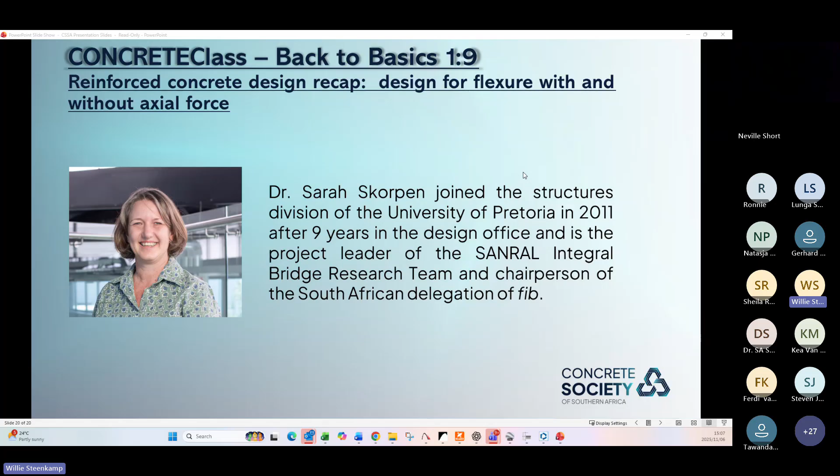Coming back to today's Concrete Class, Back to Basics 1.9. The topic is reinforced concrete design recap: design for flexure with and without axial force. The presenter is Dr. Sarah, who joined the Structures Division of the University of Pretoria in 2011 after 9 years in the design office, and is project leader of the SANRAL Integral Bridge Research Team and chairman of the South African delegation. So without further ado, Sarah, I'll hand over to you, and you can start and share your presentation.

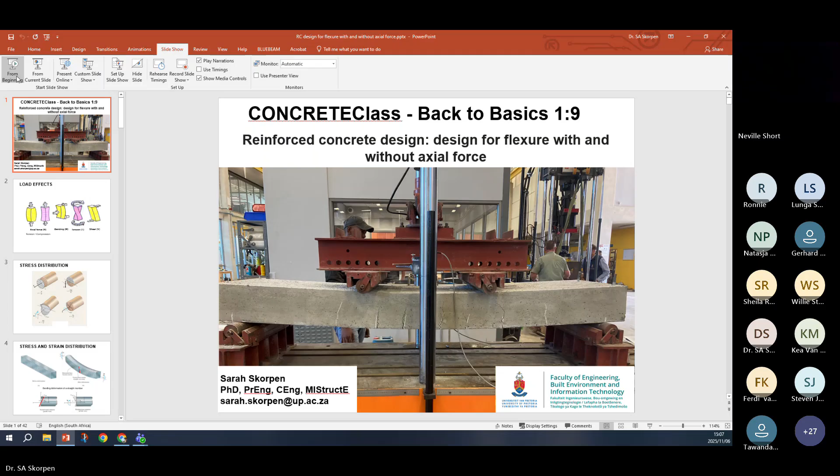Thanks, Willie. Just checking, can you see, is that coming through on your side? Yes, I can see your screen, and it's in presenter mode. Great, thanks.

Good afternoon everyone, and thank you to the Concrete Society for this opportunity to talk a little bit about design for flexure with and without axial force for reinforced concrete beams, and columns if you've got axial force. The intention here is basically a high-level overview of the structural principles we use when designing reinforced concrete beams. I've put on this title slide a beam that we're testing in the lab, in our Engineering 4.0 lab using our MTS machine, testing it in 4-point bending. You can see the cracking that's happening, which is very typical of a flexural type failure as we keep loading the structure.

So going back to real basics, the first thing we do when we're designing a structure is analyze the structure, understand the effects of the load on it. In any structure, there are only 4 load effects you can ever get: axial force, bending, torsion, and shear. Whatever kind of load you get on the structure, it's going to result in one of these load effects or a combination of them.

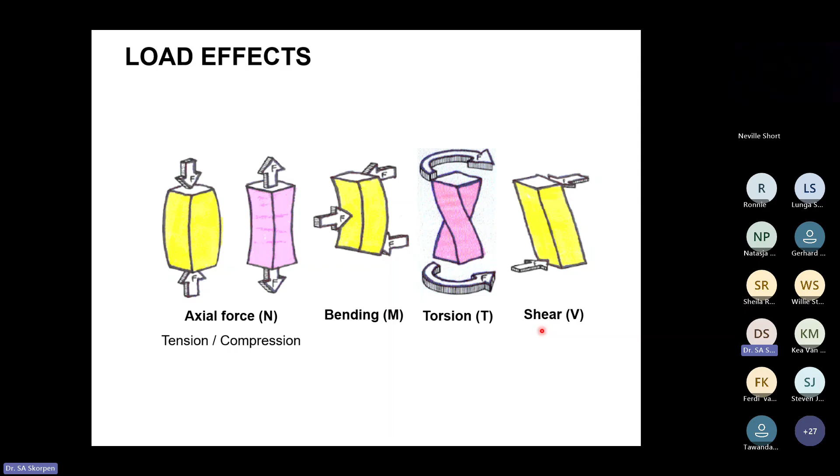These load effects, axial force, bending, torsion, and shear, if you go back to your strength of materials textbook, you'll see we look at the stress distribution resulting from these load effects. We note that when looking at the actual stress caused by load on a structure, we only get 2 different types of stresses: a normal stress, perpendicular to the cross section, and a shear stress, which is in the plane of the cross section.

When you're looking at axial force, in this top left-hand corner, this is a tensile axial force causing a stress perpendicular to the cross-section. That stress is a uniform stress equal to the intensity of the force divided by the cross-sectional area.

When we look at bending, this also causes a stress perpendicular to the cross-section, but the magnitude of the stress varies from the neutral axis out towards the outermost fiber. The equation is stress equals My over I, so it's dependent on the magnitude of the load, the distance from the neutral axis, and the stiffness of the cross-section, the I value.

If we look at the other 2 types of load effects, shear and torsion, these both cause shear stress. A shear force causes a shear stress dependent on the magnitude of the shear force and the width of the cross-section, that value t. That stress distribution is parabolic, so it's 0 at the outermost fiber and increases towards the neutral axis.

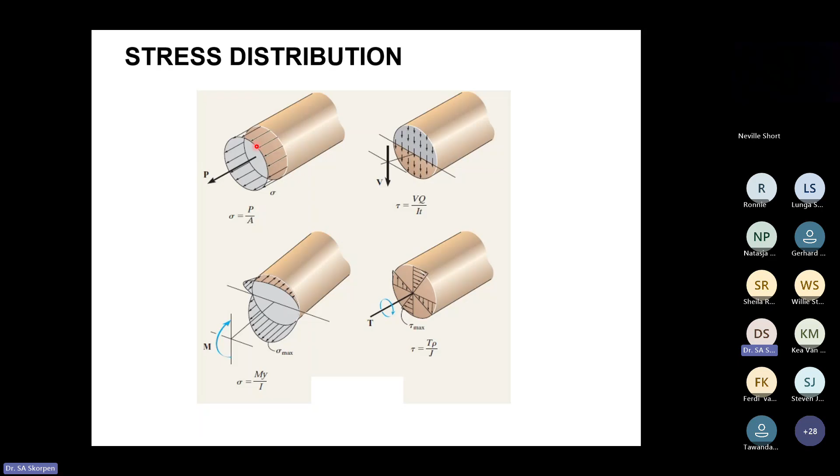So if we now look at what's happening when a beam bends, the first thing we look at is what kind of deformation or strain we get in the beam caused by bending. If we look at this rectangular beam before and after we apply the moment, and draw horizontal and vertical lines, these horizontal lines will become curved with the bending moment, and the vertical lines will remain straight but rotate. That gives us the starting point to understand what is happening in a beam when we're looking at bending.

If we plot these vertical lines in terms of the strain profile, we'll see that the deformation profile within the cross section is a straight line. So we have normal strain, which is linear, and it changes at a certain point from stretching to squashing, going from tension to compression. That is what we also see with the stress distribution - the strain and stress distributions are linked, giving a linear strain distribution, and when we're in the elastic range, a linear stress distribution.

In this instance, we would have tension on the bottom and compression on the top, and you would have a tensile stress below this zero strain, zero stress point, which is defined as the neutral axis, and it would vary linearly out towards the outermost fiber. The relationship here is stress equals My over I, our classic formula for understanding flexure. This just reminds ourselves of what's actually happening in flexure.

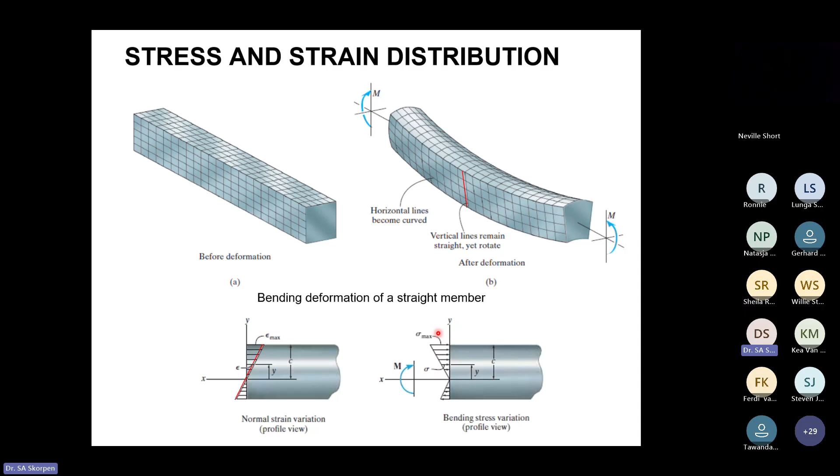Another helpful thing when looking at flexure is to examine the principal stresses and their distribution through a cross section. Here is a simply supported beam with a uniformly distributed load, and this plots half of the beam with a center line. Just to refresh your memory, principal stresses are the maximum and minimum normal stress, perpendicular to the cross section, at any given point, acting on a specific plane where there is no shear stress.

When we look at the principal stresses in the middle of this beam, they act perpendicular to the cross section, specifically at the critical outermost fiber points where we get maximum stress. As we move towards the edges of the beam, the shear forces causing shear stress start to influence the orientation of the principal stresses. You can see clearly compression stress in the top of the beam and tension stress in the bottom. With concrete, we're really interested in where the tension is, because concrete doesn't handle tension very well, so we need to make a plan with our reinforcement.

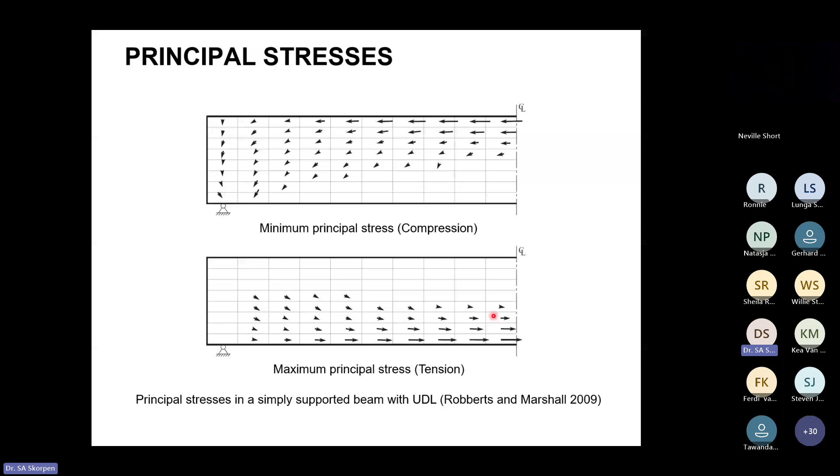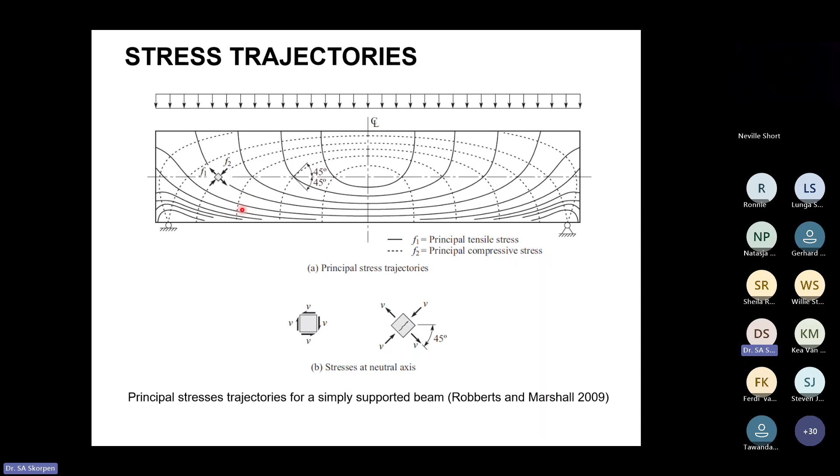We can also plot stress trajectories, which are basically a set of orthogonal lines that map the direction of the principal stresses, helping us visualize the flow of forces through the structure and understand how to reinforce it. We can see the principal tensile stresses here, which are basically parallel to the beam axis. As we move to areas of high shear, that angle changes, helping us understand how the beam will behave if we don't reinforce it, and we reinforce it to withstand these stresses.

The next thing we need to understand, moving from the loads on the structure and the stresses they cause, is how the material behaves under load. The first graph, from Robberts and Marshall, looks at compressive stress versus strain for different sample sizes and shapes.

We know in South Africa we use quality control on site-cast cubes to verify the compressive stress of concrete. In America, they use cylinders. You can see if you had the same strength concrete, you would have a higher compressive strength with a cube versus a cylinder, because of the reduced confinement in a cylinder. So a cylinder strength is approximately 80% of the cube strength, and you can see that difference here.

But now we're not just looking at something working in compression, we want to look at flexural behavior - specifically the flexural compression strength. You can see here that if you plot the flexural compression strength of a beam with a bending moment, it's approximately 2/3 of the cube strength, or 85% of the cylinder strength. That's an important thing to keep in mind.

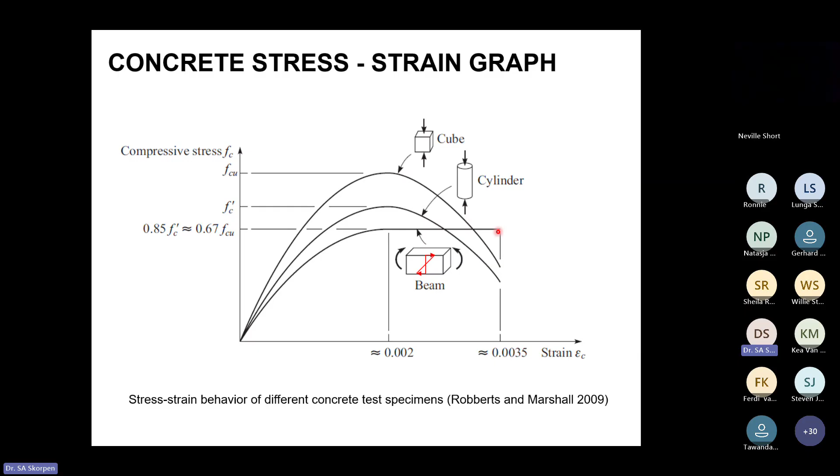We also see here that the stress-strain behavior of a beam with a moment applied to it gives a parabolic stress distribution up until a strain of approximately 0.002, after which we get a fairly uniform increase in strain with a constant stress level. This is also a principle we're going to use to calculate the moment capacity of a beam.

So here is the stress-strain graph of our concrete on the left-hand side, plotted next to the simplified stress-strain graph for reinforcement. There's a fairly big difference. You can see we've got a parabolic curve for the concrete, so it's fairly non-linear up until a point where it flatlines basically.

The other thing we're not plotting here is the tensile strength of the concrete. This is looking at the compression strength of the concrete. The tensile strength of the concrete is fairly low, only about 10 to 15% of the compression strength. So concrete doesn't handle tension very well. Yes, it can handle some tension, but we really want the reinforcement to handle the tension, because this is pretty much equally strong in tension as well as compression.

We've got a fairly linear stress-strain relationship, and we know that the E value, the stiffness of the material, is approximately 200 gigapascals until we reach the yield strain, which for our 450 MPa rebar is 0.001957. After that point, we've got a lot of ductility within the material. You can see it can handle a lot of strain before you would eventually get to any kind of fracture. So it's fairly linear in the elastic range, and it's a very ductile material, as opposed to concrete, which tends to be more brittle.

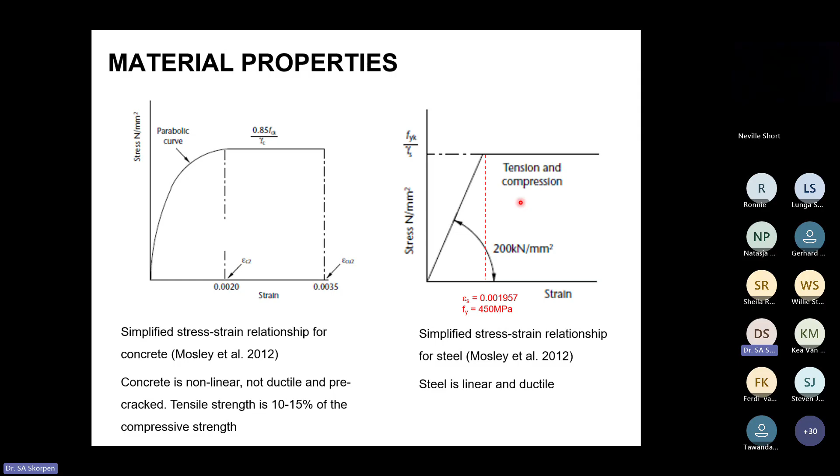This is an important structural principle that we use to our advantage in structural design: we make use of ductility to help us. Before we move on and talk more about ductility, we must remind ourselves what ductility is. If I've got two graphs here, on the left-hand side we've got the stress-strain graph of a brittle material, and on the right-hand side we've got the stress-strain graph of a ductile material.

You can see the brittle material has very little plastic deformation that can happen, and a very small amount of strain happens before you get fracture, and this point would be where it fractures. So very little warning before you get failure, as opposed to a ductile material - and this is looking at structural steel - you can see a lot of deformation happening before you get final fracture.

So ductility is basically a measure of the strain deformation that a material can undergo before you get final fracture. What one needs to watch out for in structural steel is as you tweak the strength of the steel, typically done by adding carbon, you're increasing the amount of stress it can handle, but you're decreasing the ductility - the amount of strain that happens before you get fracture.

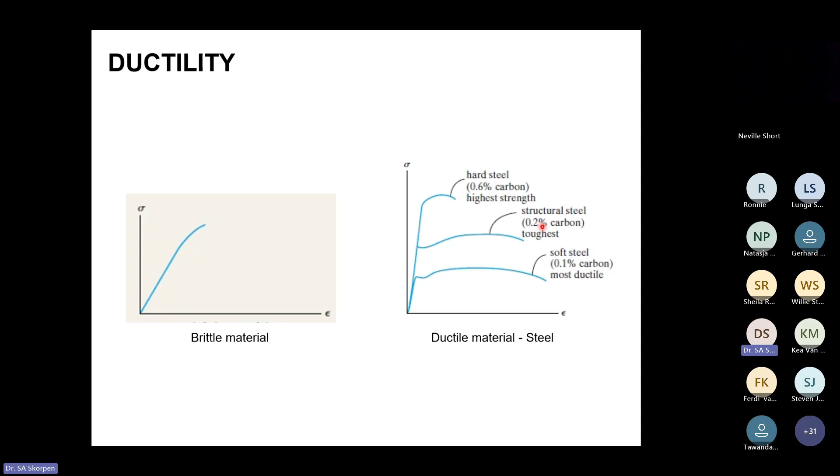Now if we take all this background information and look at what we're trying to do with the reinforced concrete beam, we're basically designing a composite beam where we use the tension reinforcement to handle the tension that develops in a beam that's bending, and the concrete on the other side of the neutral axis handles the compression.

This composite action requires that we make sure we've got sufficient bond. If you had a bond failure, you couldn't get this kind of composite action.

When we are looking at an ultimate limit state design, we would basically be ignoring any contribution of the concrete in tension below the neutral axis, and we assume that the reinforcement is doing all the work, and then above the neutral axis the concrete handles the compression side of things.

Basically you end up with this equilibrium situation where you've got a resultant compression force in the concrete equilibrated by the resultant tension force in the steel, and the moment capacity is a couple moment - force times distance, or force times lever arm. So that's the principle we're looking at, and it's a composite design.

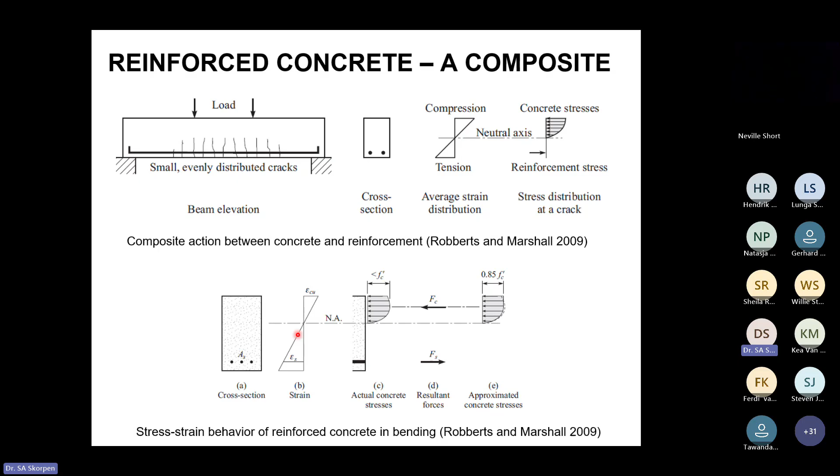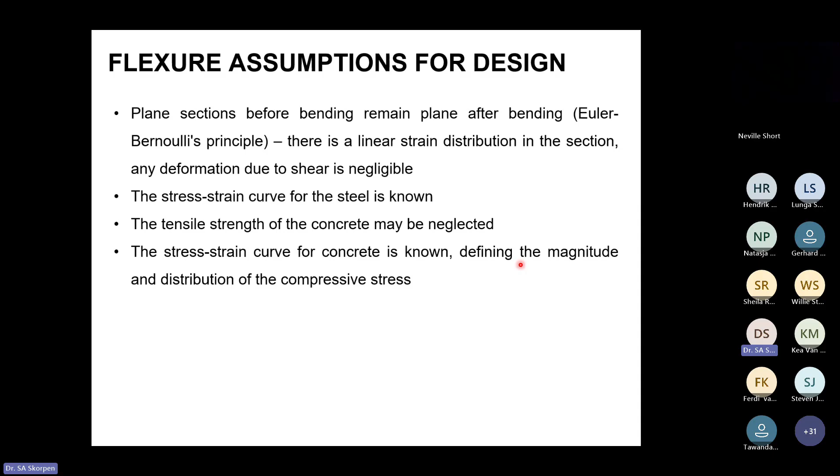That's basically what we're saying with plane sections remain plane. The other important assumption is that the stress strain curve for the reinforcing steel is known, that the tensile strength of the concrete is negligible, and we're going to ignore that, and that the stress strain curve for the concrete is known, so we have the magnitude and the distribution of the compressive stress that can develop in the concrete. So those are our assumptions that we use going forward.

If we look at that in a bit more detail, what is happening to the curvature and bending within the beam as we increase the load. This is a nice sketch from Robberts and Marshall, just looking at the distribution of stress and strain for flexure as the moment is increased. And this little graph here shows curvature.

Curvature is basically defined as the measure of how much the beam would bend. It's the rate of change of the slope of the beam under load. It's the magnitude of the moment divided by the E value and the I value of the material and the cross section, basically. So that's curvature, but it's basically linked to bending and to the amount of deflection that happens.

On the vertical axis, we've got the moment here, and you can see 4 points that I've plotted here. The first point is where the concrete cracks, and you can see very linear behavior until the concrete cracks. Then you get a sudden softening, a sudden loss of stiffness as well when the concrete cracks. Below the neutral axis, we would be ignoring any contribution of the concrete in tension, and now all of that tension force is going to be assumed to be taken by the reinforcement.

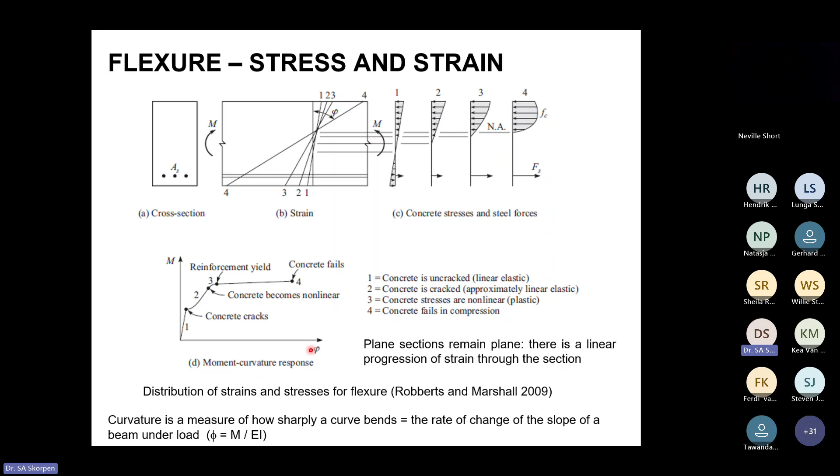And you can also see that if this is now what is happening in the structure, there's a fair amount of ductility in this structure, but we're going to look at that in more detail because this is going to depend on how much reinforcement you've got as to how much ductility you've got in the section. So on that note,

What we want to have in our reinforced concrete structures is typically called an under-reinforced beam, where we have a ductile tension failure. That is basically saying we've got a low enough steel content in the section that the steel yields before the concrete reaches its maximum strain. And we said that maximum strain, where concrete would fail brittly in compression, is 0.0035.

So this is the strain distribution that we want, and this can only be like this if we don't put in too much steel, basically. So we make sure that the steel percentage enables the steel to yield before the concrete crushes, basically. And this would be a tension failure. So we call this an under-reinforced concrete beam, but basically we're forcing the steel to yield before the concrete crushes, which would be a brittle type failure.

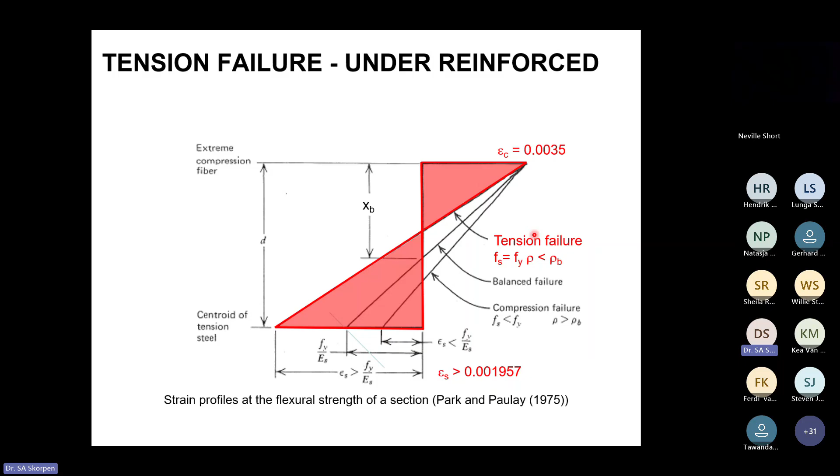An over-reinforced concrete beam would be where the steel does not yield and the concrete reaches its maximum capacity before the steel can yield. You can see here that the neutral axis is dropping right down, and this would be classified as a compression failure. And this failure would be a brittle type of failure, a very sudden failure.

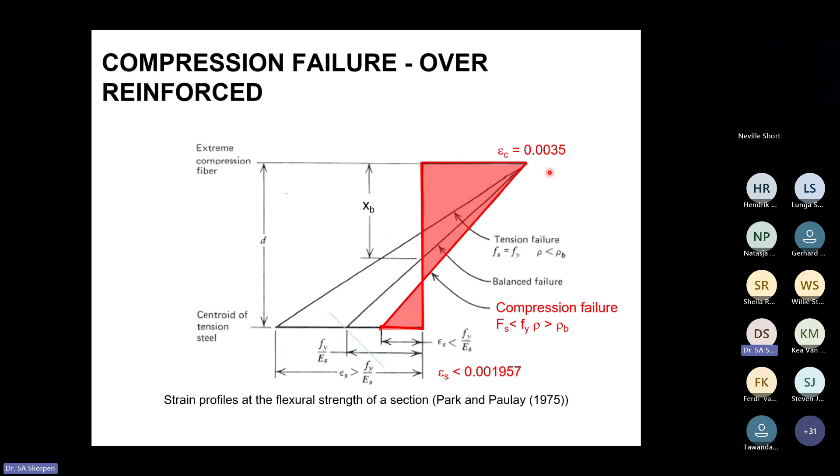So this is a failure we don't really want in our structures. We'd rather have a lot of warning before we see the failure happening. But here, if the element is over reinforced, you would get the concrete maximum strain reached, and that maximum strain is 0.0035, before the steel reaches the strain at which it yields.

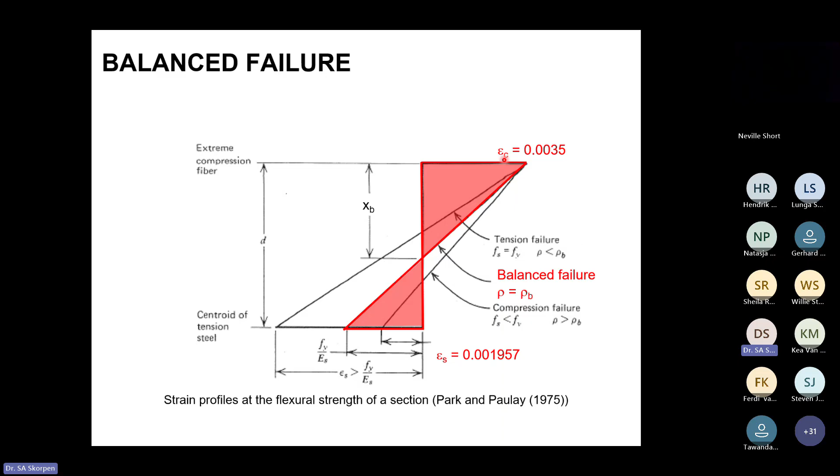Now, what our calculations or formulae are based on is something called a balanced failure, which is where the concrete crushes as the steel yields. So this percentage of steel - we could calculate what this is - but this would give us a balanced failure, which is concrete crushing as the steel yields.

Just to illustrate this further, this is a sketch, or a graph, two graphs just showing the moment versus curvature, curvature on the horizontal axis, for an under-reinforced versus an over-reinforced beam. And you can see here the crack moment, M sub CR, would be very similar for both of them,

but we get a lot more ductility out of an under-reinforced beam versus an over-reinforced beam. You can see very sudden failure just after the linear elastic region here - you're getting a compression failure versus a lot of plasticity and ductility shown in the under-reinforced beam.

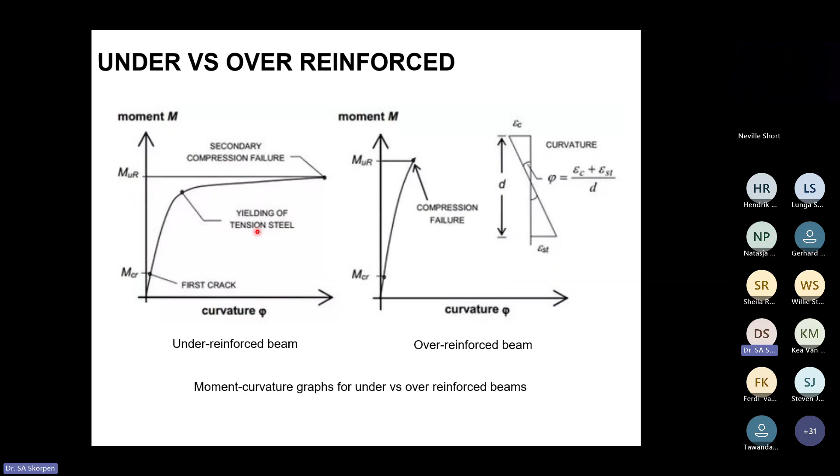This is something we do every year with our third year class. We test three different beams to failure: an under-reinforced beam to failure, an over-reinforced beam to failure, and we also look at a shear failure, which I'm not going to talk about today. This is just showing a ductile failure mode with a fairly uniform distribution of cracking, typical of something working in bending.

There's flexure happening here, and you can see these crack widths. If you only had one crack, there's probably very little bending happening, which would be synonymous with some kind of restraint, like restrained shrinkage. But when there's flexure, you see these fairly uniformly distributed cracks, so you can follow the curvature of the beam.

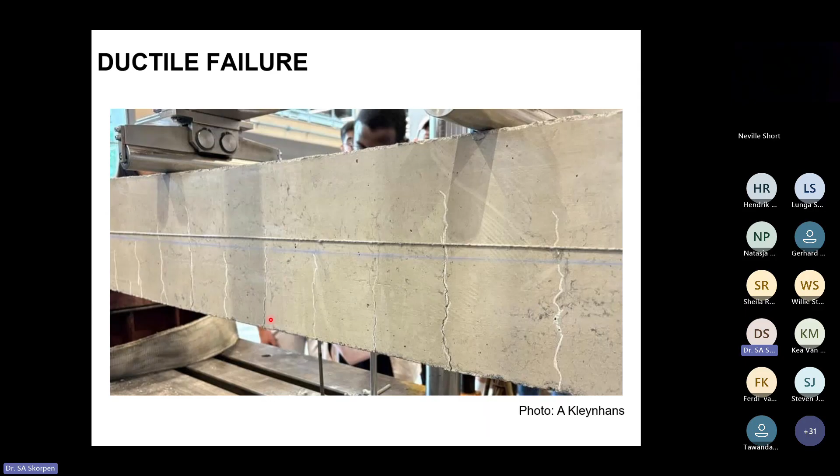Here's another view, just showing the bend. You can actually see the deflection here, and these uniformly distributed cracks. Eventually the steel would start to yield, and a final failure would occur when the concrete crushes.

But if you had an over-reinforced beam with a brittle failure mode, you can see much smaller cracks, and then all of a sudden this brittle failure where the concrete suddenly crushes — that's your over-reinforced beam.

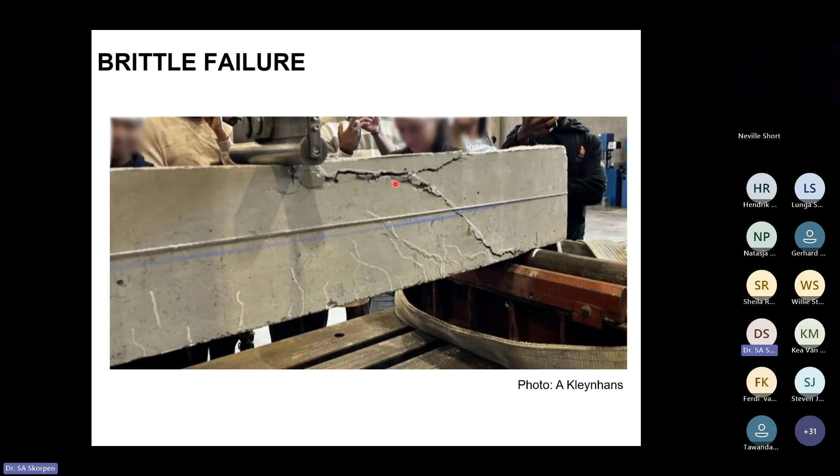So we're using the terms under-reinforced versus over-reinforced. Obviously you're designing for your load effects, but if you put in too much reinforcement, if it eventually gets to failure, you would prefer a ductile failure mode as opposed to a sudden brittle failure mode.

Here's another view of this, and again you can see much smaller cracks, fewer cracks, and then the sudden mode of failure here.

Sorry if you're hearing strange sounds from my mic. We've got a storm happening here at Pretoria, so there's a bit of thunder behind me.

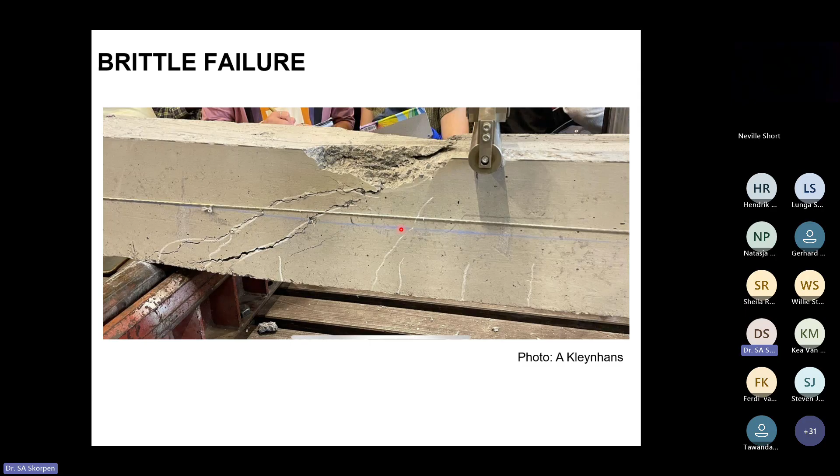Just recapping on this, you can see the progression of strain and stress distribution as we move from a moment pre-cracking. We've got a linear strain distribution and a linear stress distribution. We calculate our resultant forces in tension and compression, and we're able to calculate what that moment is, which would be equal to the moment applied.

After cracking, we ignore any contribution of the concrete in tension, and again we're looking at equilibrium. The tension and compression forces need to equilibrate, and the moment is equal to the force times the lever arm. Before the ultimate moment, we are lower than the maximum strain that concrete can handle.

If we now look at the ultimate moment the section can handle, we're taking the strain in the concrete to its maximum, 0.0035, and we'd look at a parabolic stress distribution, which we'll talk about now, again equilibrating horizontal tension and compression forces and calculating the resultant compression force on the compression side, equilibrating that with the steel.

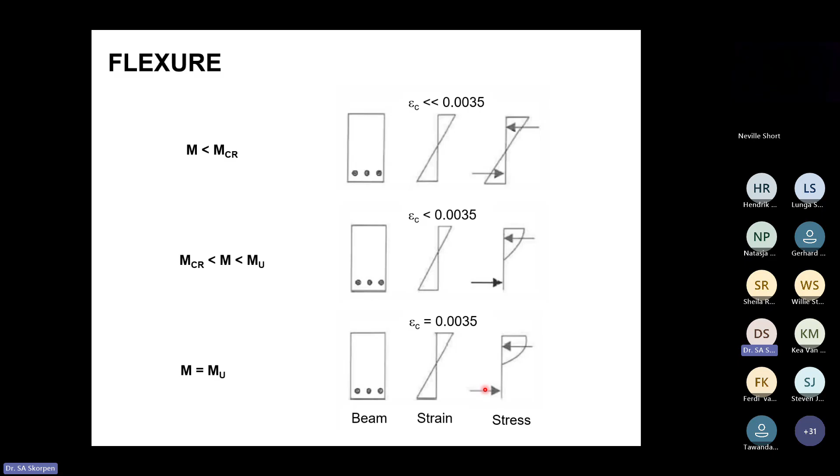If we now look at designing this for our limit state design method, we use partial material factors and load factors to come up with an acceptable probability of failure. When looking at reinforced concrete design for flexure and axial force, our partial material factor for concrete is 1.5, and for the reinforcing it's 1.15.

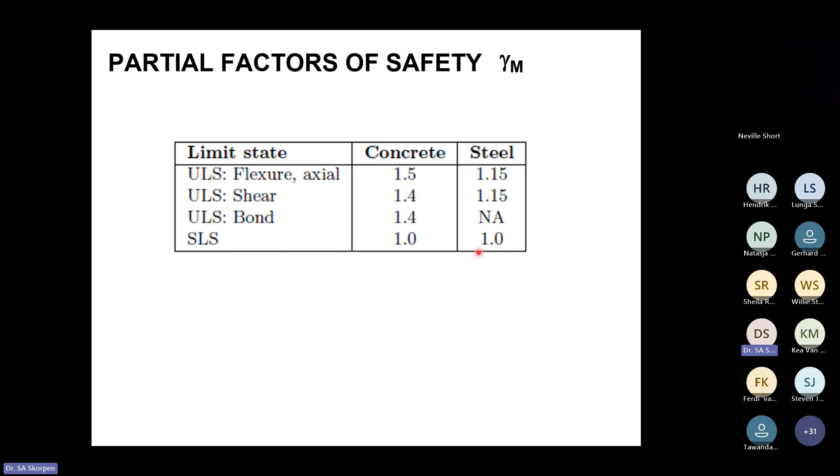There are other factors in terms of shear and bond, 1.4 — I think in the new code we are adopting this has become 1.5, but that's something I need to verify. You can see what the other factors are. When we're looking at serviceability in terms of loading, we come down to 1.

Now using our partial material factor of 1.5, and knowing that in terms of bending of a beam we can only use 85% of our cylinder strength — and I'm working with cylinder strength here because that's what the Eurocode does, and we are going that route — these sketches are for cylinder strength, not cube strength.

When we are looking at the ultimate limit states, we have our parabolic stress distribution, which for ease of calculation, we use an equivalent rectangular stress block, which has got exactly the same resultant force. So this resultant force from the parabolic stress block, if you use 80%, 0.8 of the depth of the neutral axis, we can calculate the same resultant force, F sub cc, and the position of the resultant force would be the same. It would be at half of the depth of the stress block of that 0.8x. So that's going to give us the same effect as the parabolic stress block.

It just makes the calculations easier. This is something that has changed from the old code to the new code. In SANS 10100 part 1, this was 0.9, so it's now 0.8. Just something to be aware of as we go forward into using the adopted Eurocode.

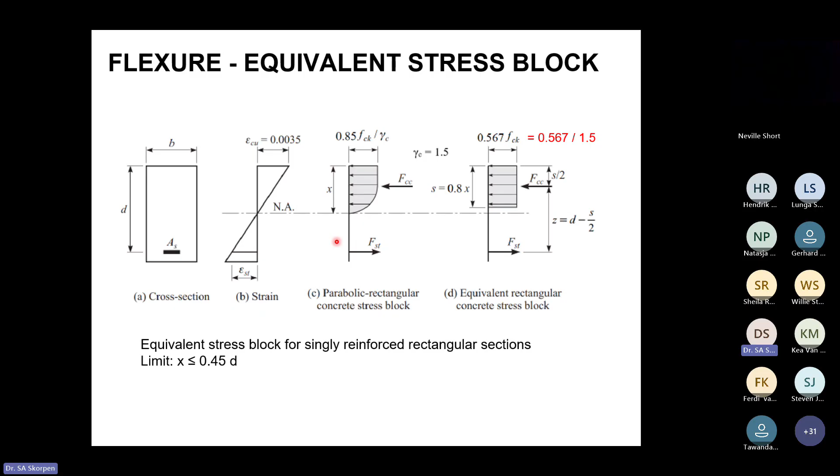And we set a limit on the depth of the neutral axis. We don't want this to go too low, otherwise we're going to get our brittle failure mode, our over-reinforced brittle failure mode. So we set that at 0.45 times D.

Just ending on this concept of flexural ductility: if we think about concrete, obviously it's brittle by nature, but we can overcome this by allowing the ductile reinforcement to control the structural behavior. That's basically what we're doing with an under-reinforced beam. We're letting the ductile material govern, but we can only do that if we don't put too much reinforcement in it.

So if we increase the reinforcement content, that now needs a deeper stress block to equilibrate the tension force in the steel, and that drop in...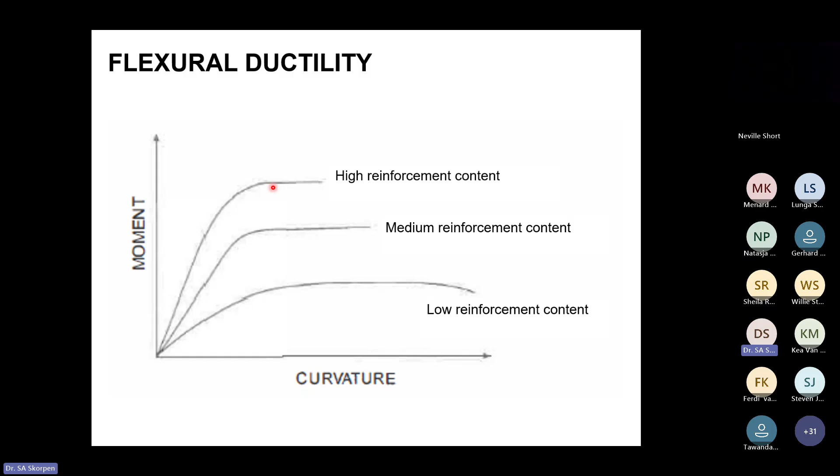So then when we're looking at the design of a reinforced section, this is now what we call a singly reinforced cross section. We've just got tension reinforcement at the bottom here, to make sure that we've got enough ductility, we limit the depth of the neutral axis to 0.45 times the effective depth, D. This typically corresponds with a steel percentage of around about 1.2%.

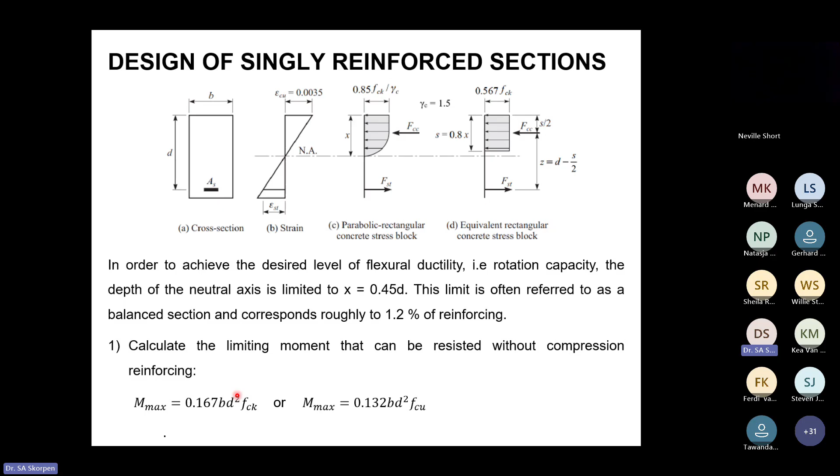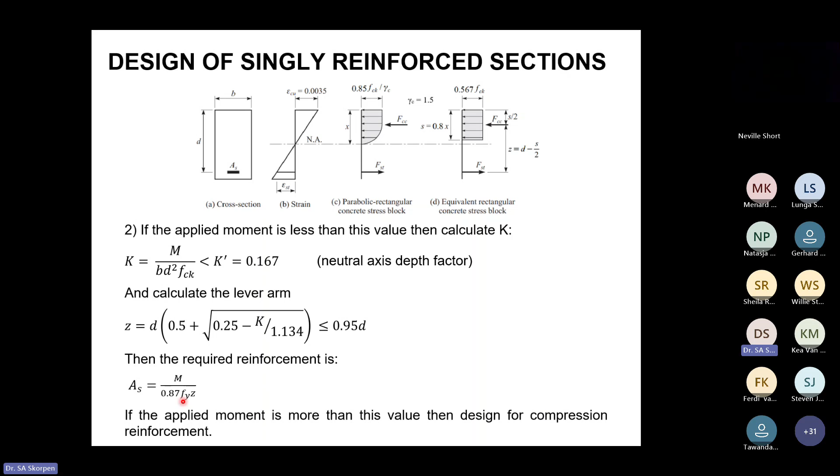We would start by checking what the limiting moment is without any compression reinforcement. These are the two equations you would use if you're using cylinder strength and cube strength. Then if you had a moment that's less than the maximum moment without compression reinforcement, you would calculate a neutral axis depth factor, a K factor, and use that to calculate this Z value, your lever arm, the distance between the centroid of the compression force and the centroid of your reinforcement. Once you've got that lever arm, you can calculate the amount of moment reinforcement that you require for your applied moment.

If we now can't get the section to work with just tension reinforcement, we can add compression reinforcement, which now is going to increase the strength of the cross section. It's going to increase the lever arm, and it's also going to help with ductility, because now in your compression zone you've got a ductile material, so that's going to help. And it helps with confinement, so it can increase the strain capacity of the cross section.

The one important thing to note is that yes, on the tension side, the tension steel might be yielding, but not necessarily on the compression side. So you would need to calculate what the stress is in the compression steel, depending on the strain that's in the compression steel. But again, in terms of calculating the moment capacity of the doubly reinforced section, we would be applying principles of equilibrium.

So the sum of the tension forces must be equilibrated by the sum of the compression forces. The moment resistance would be equal to—typically we take moments about the reinforcement—the moment of the compression force about the reinforcement, plus the moment of the compression steel about that reinforcement. That's how we calculate the moment capacity.

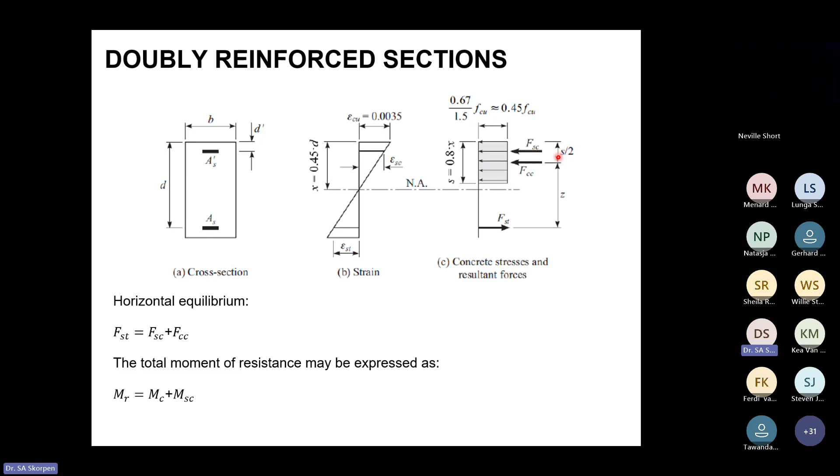So that's just looking at flexure for a rectangular section, but most real sections and real structures are tied into a slab, so we're basically dealing with a T section. If we're looking at a simply supported beam, you can see the bending moment diagram, sagging moment at the midspan. Now at the midspan, obviously the compression block is going to be in the flange of the T section.

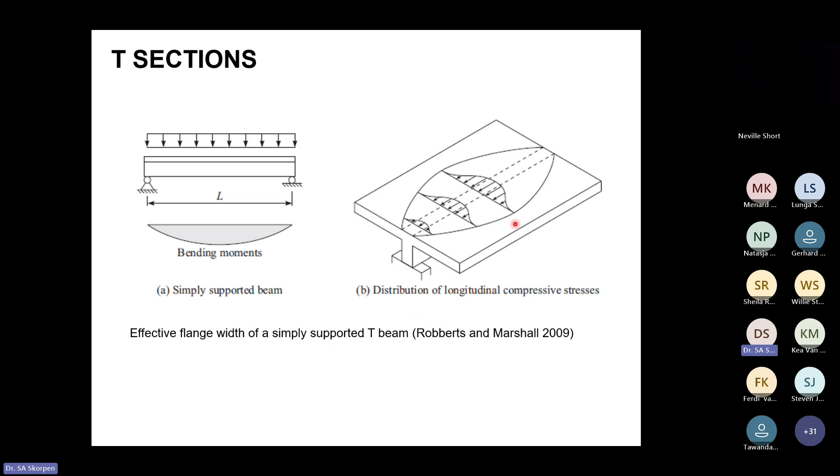And how much of that flange can you use for that compression block is the question we need to ask, because we can kind of guess that the longitudinal compression stress distribution in that top flange is probably not, and is not going to be, uniform. And we obviously are assuming a uniform stress distribution.

So we would then need to calculate an equivalent effective flange width, which is sometimes, if these beams are spaced close enough, equal to the spacing of the beams, but most of the time it's not. So we need to calculate what that is for a T section, and that's important. It's going to be linked to the span, the length of the beam it's spanning, and the distance between the points of contraflexure.

So because you're looking at the sagging moment region, basically—but on that note, this is only applicable for sagging moments. When we're looking at hogging moments, the flange section is considered to be cracked, so then you're only looking at the width of the web as contributing to carrying compression. That's just in terms of real behavior.

We need to look at how much of the flange we can use to carry the compression force, and that we do with an effective width. And if it's on the edge, you would also be looking at the effective width of the L section there.

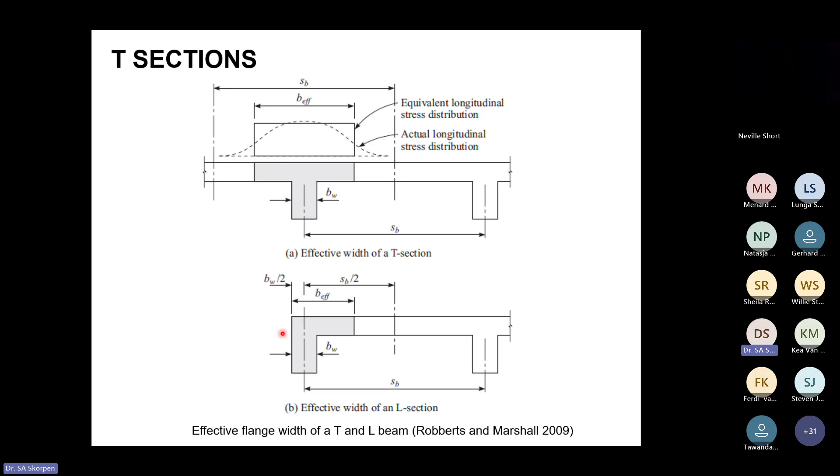And we would obviously need to determine where that neutral axis lies—where you're going from compression to tension or vice versa, that's the neutral axis position. For a T section, it could be in the flange, and then basically we treat it like a rectangular section. But if it falls within the web, if it's a bit deeper or lower in the section, now we need to take into account the fact that we've got two different widths here.

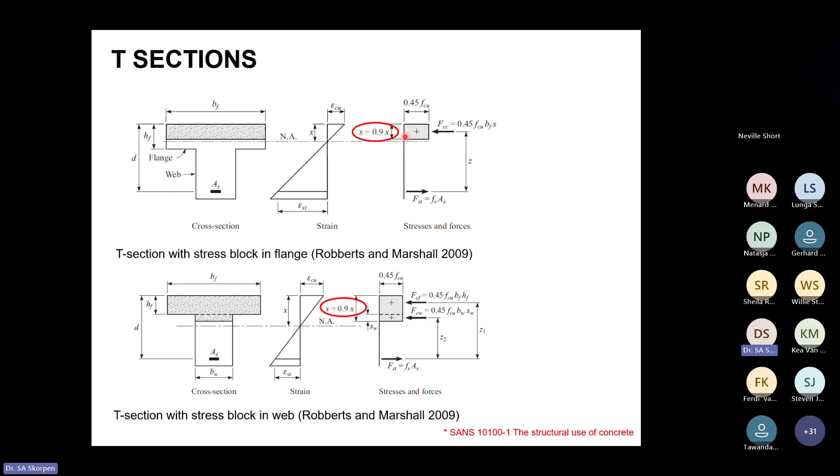Just to note on this: this is a sketch based on SANS 10100, where our equivalent stress block was 0.9 times X. Just a note on that—it's now 0.8 times X.

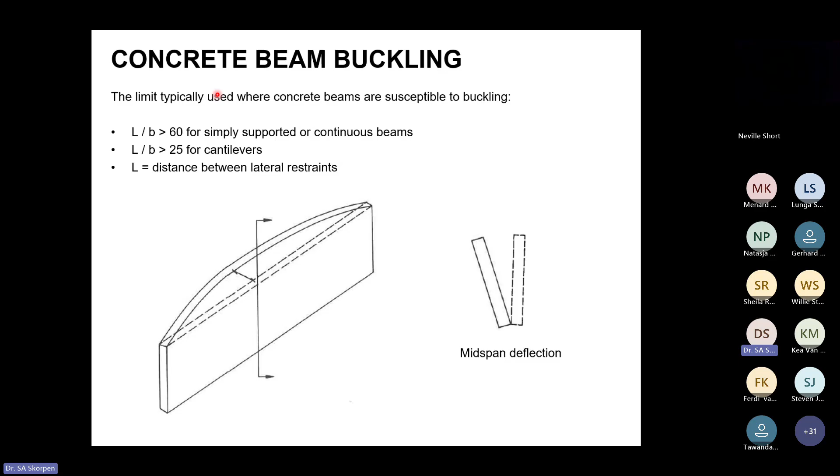Lastly, before we add axial force to the equation, just a note on stability. When we're looking at structural steel beams, one of the big failure modes we need to think about is buckling and lateral torsional buckling. Typically concrete beams are not susceptible to this mode of failure, but if you had a very slender, thin beam, where your length to width ratio is greater than 60 if simply supported or continuous, or 25 if it's a cantilever, then one would need to watch out for beam buckling, and it's something you would need to consider. Most cases it's not an issue, but you need to be careful of that.

So now coming to the end—at the beginning we saw bending as well as axial force, both causing normal stress, and in a lot of elements in a structure you've got both of these things. So now we need to think about flexure and axial force together, because they're both causing normal stress, and we obviously have to design it to resist both of these things.

Now, if we take this back to basics: if we had a compression resistance of a cross section, C sub R, and a moment resistance, M sub R, and we put the full compression force on that element, so C, the applied load, was equal to the resistance, that ratio would be equal to 1, and we would not have any extra capacity for any additional moment.

Similarly, if we put the full moment on the section, the ratio of applied moment to resistance would be 1, and we would not have any room left in terms of the capacity of the section for any axial force.

But if you have something in between, where you're applying, for example, a compression force which is approximately half of the compression resistance capacity, and we came out to some points here, there's our moment divided by MR, and the intersection of those is lying somewhere over here.

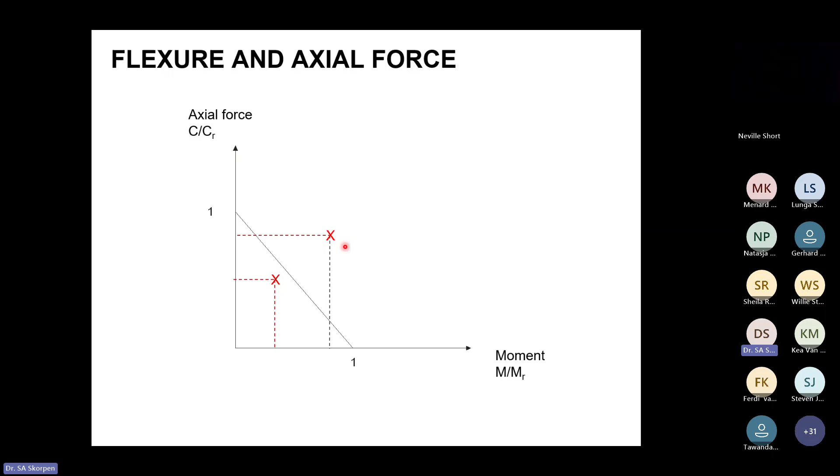We would have a section that could carry a combination of compression force and moment resistance. The very basic limiting line would be this interaction diagram, linking the ratio of compression force and ratio of moment of 1. If we're on this side of the graph, we are safe. If we're on that side, we're not safe. So that's basically thinking about combining these two load effects, which both cause the same kind of stress.

But reinforced concrete doesn't work exactly like this. This would basically be that line going from pure bending to pure compression. But we actually see that adding axial force can increase the bending capacity. It basically shifts the neutral axis and helps us use the concrete's compressive strength, and it counteracts the bending moment.

We see that the interaction between axial force on the vertical axis and the amount of moment it can carry comes outward to a balance point where we have concrete failing in compression. So we reach our maximum compression stress as the steel reaches the yield stress, and then back to your pure compression, maximum compression force over there.

So we've got pure bending on the bottom axis at point A, which is basically beam behavior. And we've got pure compression at point C, which is basically pure column behavior. Any tension reinforcement here would actually be working in compression—everything would be yielding in compression.

And you've got this balance point where, below it, we have a tension failure mode, where the reinforcement is going to yield before the concrete crushes. Above the balance point, we've got a compression failure mode, where the concrete is going to crush before the reinforcement yields.

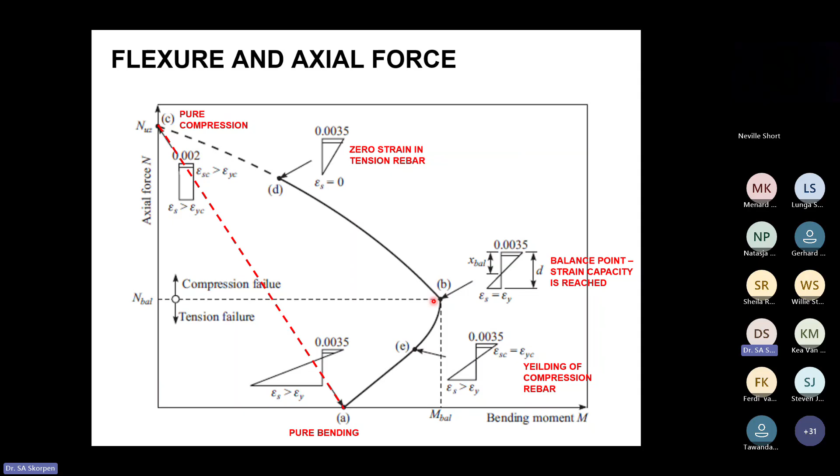So this is the interaction between bending and compression, which we see with the design of columns, because most columns have a certain amount of bending moment attached to them. But I think it's interesting to note almost the pre-stressing effect, if you want to call it that, of the additional capacity you get in terms of bending as we apply a compression force on the system.

If we're just looking at designing for flexure and axial force, again we see these principles of equilibrium of forces, compatibility of strain, and our known stress-strain relationship, and we use that to set up our design equations.

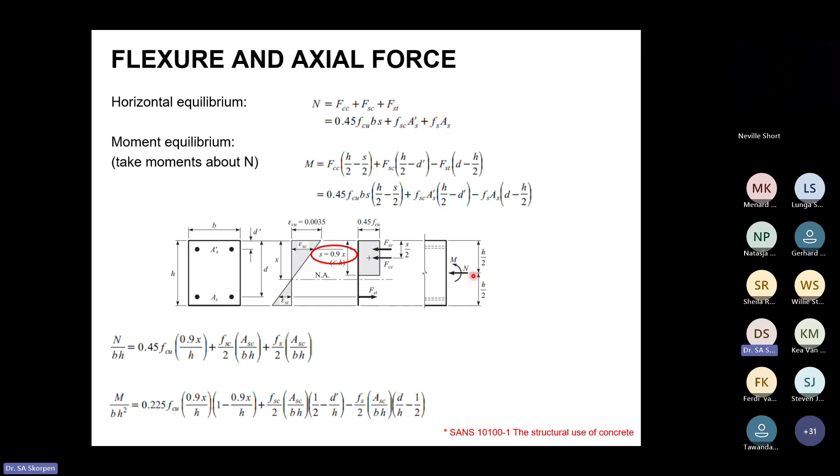So we sum the forces—again this would probably be a column, so it'd be vertical, but if we're representing it horizontally here, the forces on the compression side in terms of the steel and the resultant force in the concrete, you've got the resultant force in the steel in tension, and you would be taking moments, typically taken about the axial force location.

You can then also start to set up what we know as M-N interaction diagrams, where we can plot, typically, the axial force divided by the cross-sectional area, B times H, and the moment divided by B H squared. For different percentages of reinforcement, we can see what the moment-axial force interaction diagram would look like.

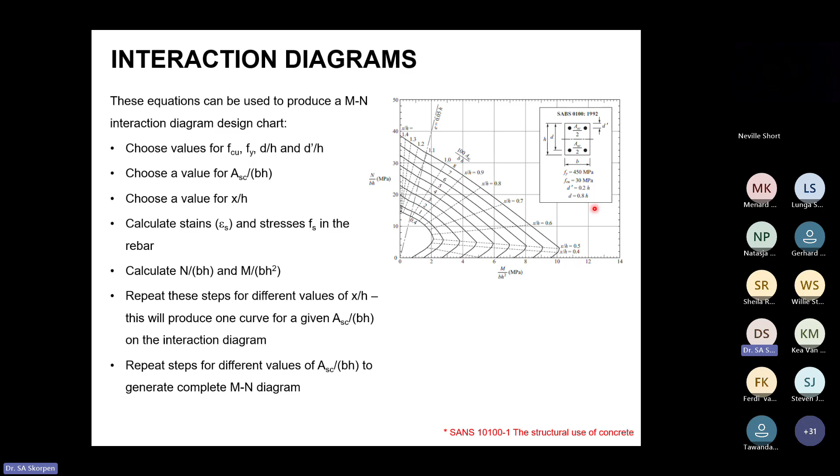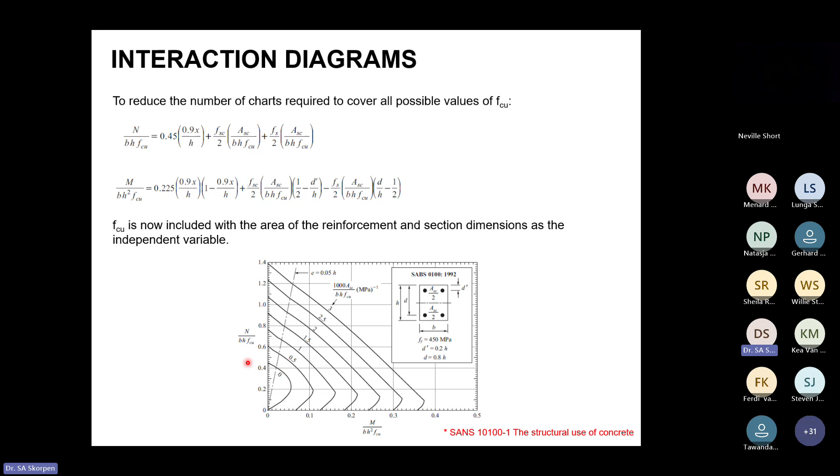These have been developed for various steel percentages, as well as a ratio of effective depth, the D value, over H. So this is specifically for different D to H values, and can also be rewritten to take out the compression stress, F sub CU, so we can use it for different values of cube strength—these would be the M-N diagrams.

And as we move towards using a cylinder strength, this is just from the Concrete Centre, you can also develop these moment-axial force interaction diagrams for various D to H ratios.

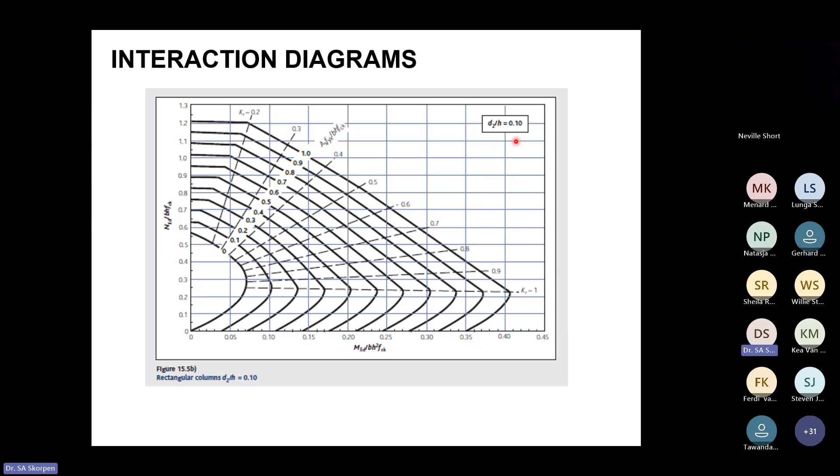Lastly, just one other thing to watch out for is slender columns, where we could go into the realm of buckling influencing the capacity of the column.

But as you start to reduce the stiffness and it becomes more and more slender, we start getting second order effects, additional deflection in the structure influencing the magnitude of the moment. The axial force you can carry comes down because you've got more moment, until you move from a material bound failure to a stability or buckling failure. So it's something to watch out for.

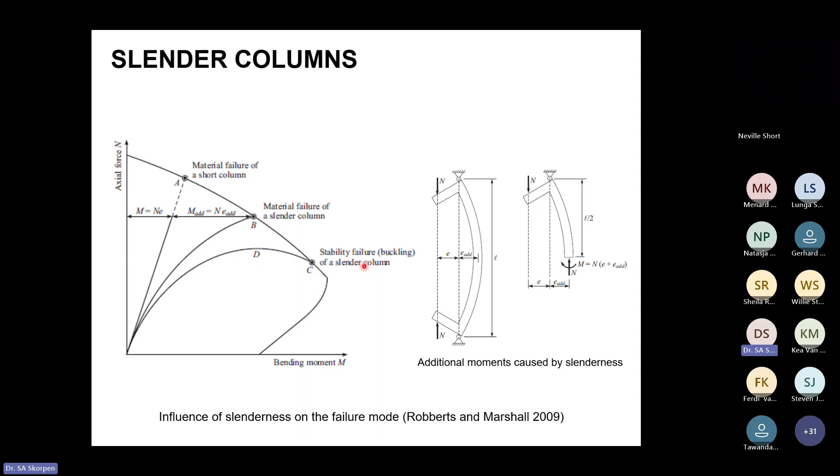And these slender columns can be complex to design, and you need to think about them carefully.

So in conclusion, I've tried to give an overview of the important principles we're considering when looking at flexural design. The first one is we need to know what the loads are, and then what the load effects are. There are only four: moments, shear, torsion, and axial force, either tension or compression. Those four load effects cause either normal stress or shear stress.

And we are basically looking at designing the structure for moments and axial force for normal stress.

Ductility is a really important principle that we are using and want in our structures. That's illustrated in the fact of under-reinforced versus over-reinforced. It's not to say it's not properly designed, but you just don't want to over-reinforce it such that you force a brittle failure.

The concept of shear lag is also very important, because most beams are going to have some kind of slab attached to them, and we can't say that the full slab is going to carry the load. There's a decrease in load and compression stress as we move outwards from the web of the beam.

And lastly, you can see the principle of equilibrium is essential: equilibrium of forces, the compatibility of strain, and our stress-strain relationships are essential in terms of setting up these design equations.

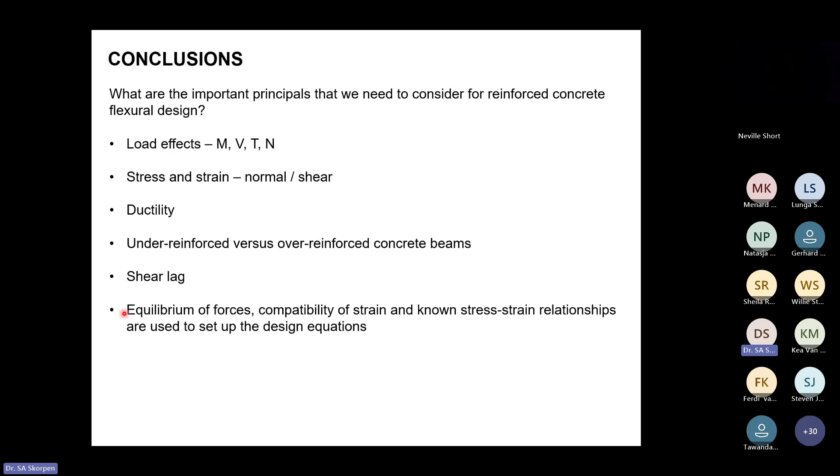Just lastly, some references that I find very helpful. Park and Paulay is a classic, and I've relied heavily on Robberts and Marshall's analysis and design of reinforced concrete structures. Our textbook for the Eurocode is by Mosley, Bungey, and Hulse, Reinforced Concrete Design to Eurocode 2. And a reminder that our new concrete code is SANS 51992, part 1, basically our adoption of the Eurocode standard for reinforced concrete design.

As far as I'm aware, yes. So it is now officially our code. I don't know if there's anyone else who knows more about that, but as far as I'm aware, yes. There were issues in terms of getting hold of it. I don't know if those have been sorted out, but yes, that is our official new code.

Okay. And do you know if part 2 of SANS 10100 has also been replaced, or is that still there, hasn't been withdrawn? That I'm not sure of. Good question, and I should find that out. I'm not sure. Okay, thanks.

Grant, can I maybe ask you, you can just pop a mail to Natasha as well. We will also follow up from our side for you. Yeah, we'll do. Thank you.

And maybe another question around the table. Don't see anyone else. Last chance. Okay, I think that's it.

Thank you, Sarah, for the presentation. You've enjoyed it, and I think, yeah, definitely. I'll also see from my side if I can find out about that part two. It's actually a good question. Yeah, we need to clarify that to know.